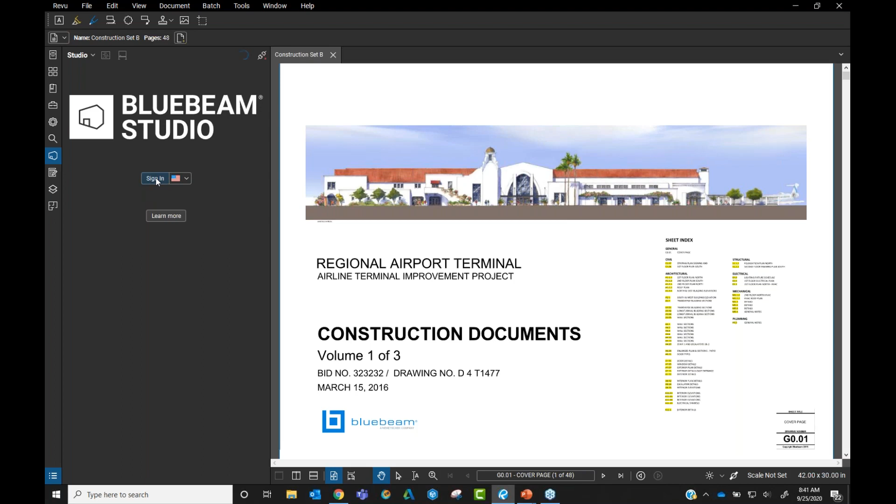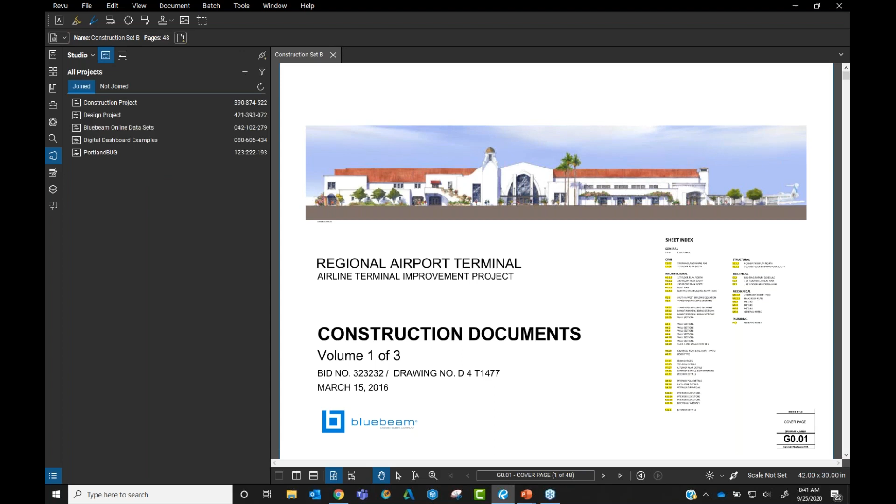So I wanted to show you a little bit about projects today. I'm going to log into Studio, and this gives me a really good talking point. I want to let you know that Studio is completely free. Bluebeam Studio is completely free. It is included with every version of Bluebeam Revu, whether you have Standard, CAD, Extreme, or if you download the free version, just the PDF reader. You're going to have access to Studio.

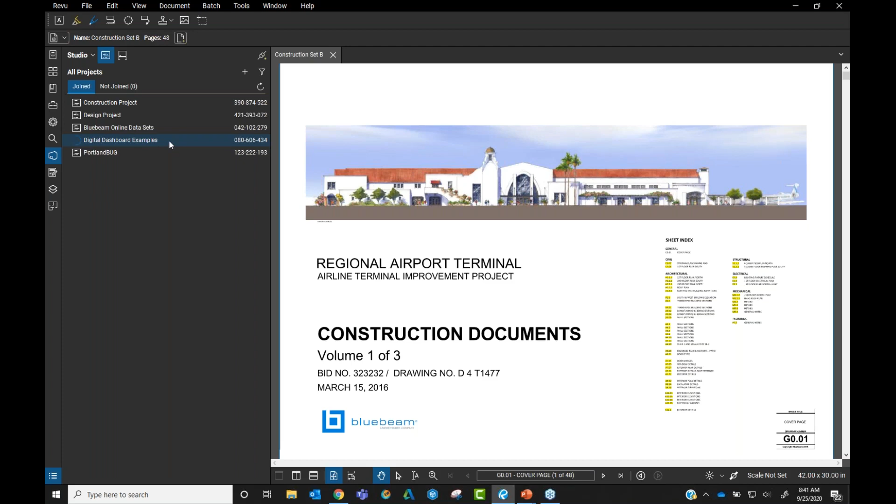Now, speaking of Studio projects, these are listed out here, and I'm going to jump into one real quick. But as it's loading up, I wanted to talk about Studio projects and Studio itself. Studio is the online collaborative environment for Bluebeam Revu, and it's broken down into two different portions: projects and sessions.

Projects is broken down into a folder structure. I like to think of this as more of a document management system or project management. In this sense, we can keep all of our documents here organized, very organized.

We can actually assign permissions. We can invite or allow access for anyone who has a Studio account, and that Studio account is free and included whether you have a paid version or not, so you can invite them here. You can set permissions overall for the project as a whole, but also drill down and set folder permissions for every folder that you have.

If you have teams out on the site that need access to specific data, you want to control the documents and versioning they're seeing out in the field, you can do that. If you have admin that need submittals, RFIs, or need to take information, any CSVs or anything we're producing from the field, any timesheets, any daily reports, we need to pull that into some other program, we can do that as well.

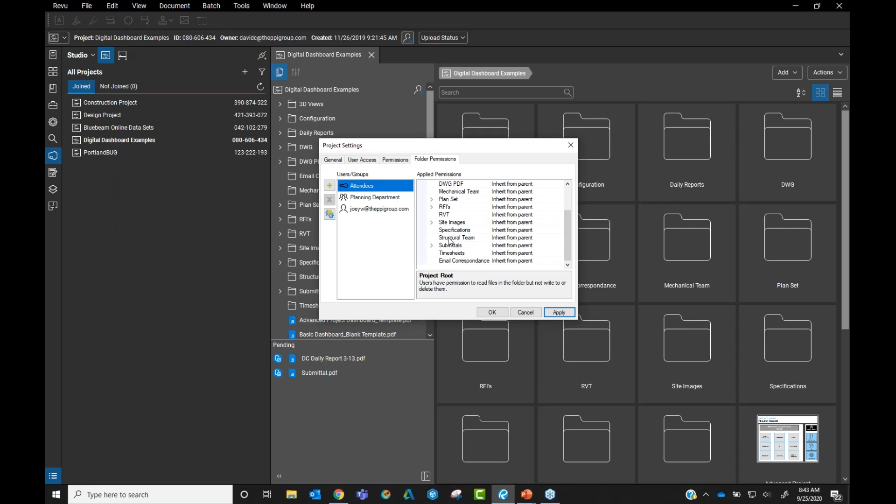Speaking of that, projects can also host any file type of any file size. So you're not limited to PDFs. You're going to see DWGs, RVTs. Now, I'm hosting these just because it's a good example of any file type.

But something that makes a little more sense might be daily reports. If I open up my Excel spreadsheet here, it's going to open up right inside of Excel. Actually, it's going to push outside of Revu, go into Excel. I can adjust it as much as I need to and push it back in.

This is a huge part, a huge key to Corsmo Construction's workflow in the sense that their personnel need to make sure they have the most up-to-date and accurate information. As we get new plan sets, we can load this information here, and essentially what we can do is keep track of, we can either slip sheet, we can replace, or we can kind of version documents through folders, we can archive it, kind of whatever the workflow may need to be. We can control that data and what people are seeing out in the field.

Or at least in general, it doesn't even need to be out in the field. It can be any project partners that you're collaborating with through the design process, or anyone that you're working with as an engineer. You're working with the designers, and you may need to collaborate and give them information.

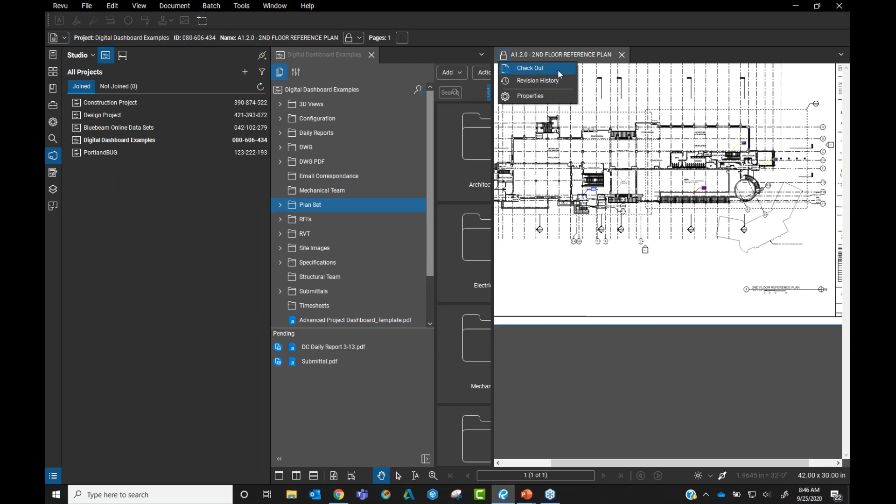For projects, and this is an interesting talking point as well, you do have to check out the document in order to mark up on it, to manipulate it, things like that. So it is a check-in and check-out workflow.

Let me close this one. I'm going to leave that open. I'm going to close down that panel there.

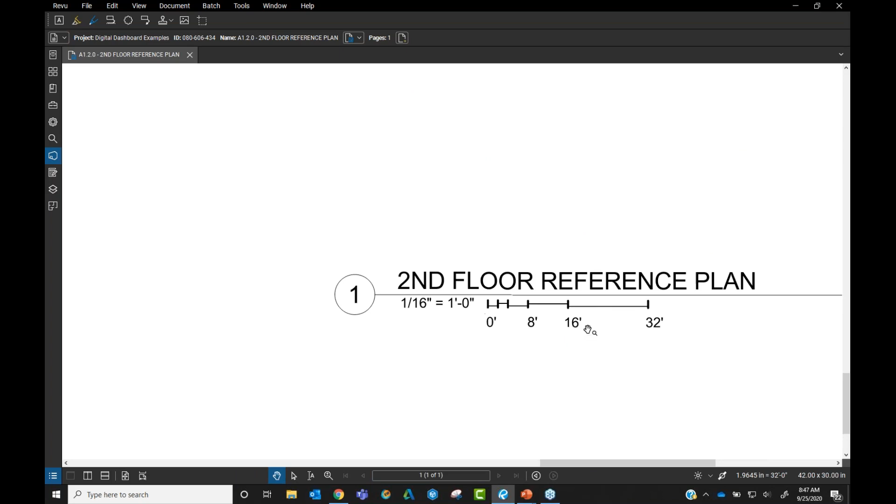I'm going to zoom in here to find my scale. As Richard said, he typically likes to take the longest dimension. I will either do that or calibrate off the document scale.

To do that, I'm going to go right up to Tools, find my way to Measure, and then Calibrate. You always want to calibrate the drawing before you take a measurement, and then double check it with a length measurement, just to make sure the scale has set.

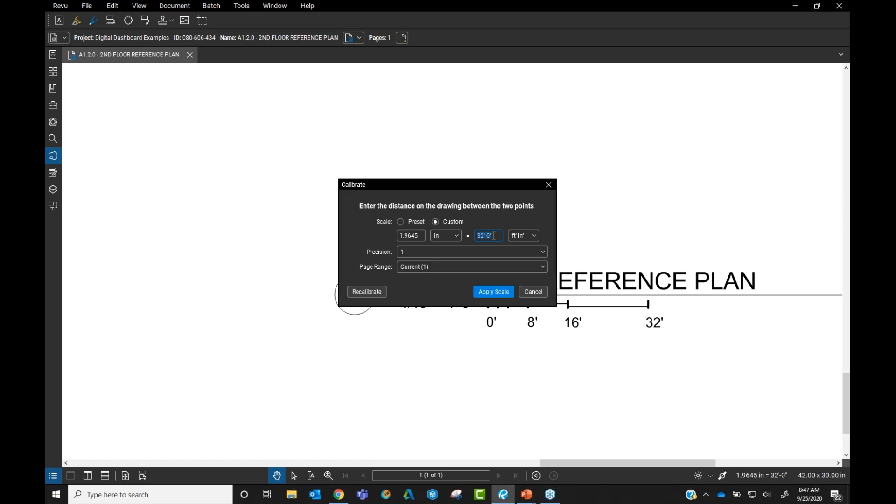So I click first on the 0, then I click on the 32 feet here. This drawing has been scaled, so you can see it's actually retaining that scale information. I don't have to do this every time I want to go in and take measurements. If I scale it once and save it, it retains that information.

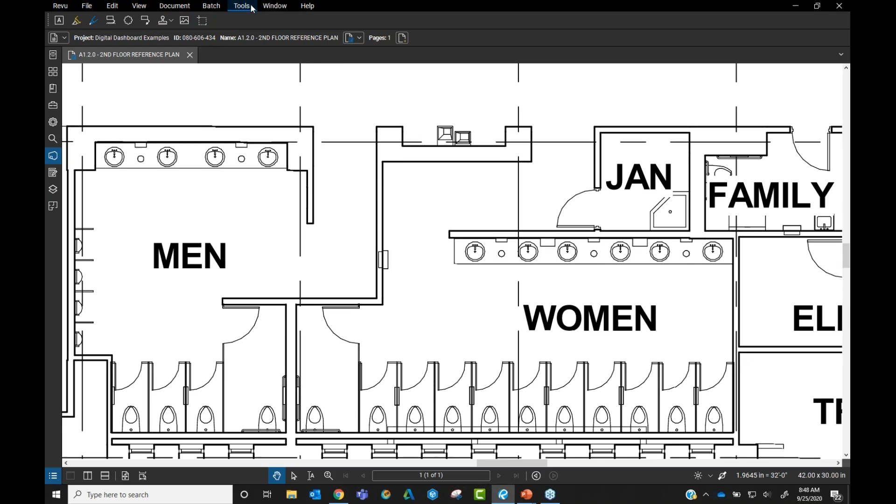Let's see, oh, this was a bad one. I don't have any dimensions on it, but what I can do is go ahead and take a quick measurement here.

Let's go from the wall. I'll hold down the Shift key. We know that ADA stall is 5 feet, so that complies with those ADA standards. That's just a good example for me to use there.

I could also probably grab this door. I'd probably go from the inside of the door jambs, but that's fine. 3 feet 4 inches, that makes sense.

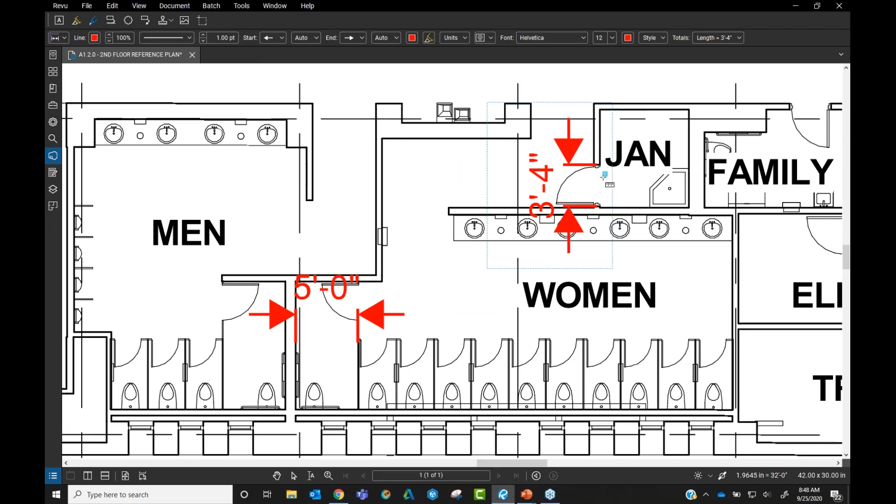Okay, so it's a quick, easy way to take nice and simple measurements. Now, this length tool here can be used in so many different ways.

One, of course, to take the length, but if we get into the actual measurement properties of this, we can adjust how this measurement works. There are so many different ways we can utilize this information, and that's not even getting into the rest of the measurement tools. We have a plethora of them: poly length, area, diameter, volume, and the count tool is also a very awesome tool.

So I'm going to get back into my presentation here. All right.

Up next, I have a quote from Jesse Hornbuckle, who is a GPS technician with Dirt Logic Incorporated. Jesse says before Bluebeam, they would commonly receive drawings that had been changed by engineers, and the engineers forgot to notate what's changed in the drawings. I've heard this is a common thing in our industry, and depending on the size of the project, finding those changes and reflecting them in our drawings can cost more time and money. Somebody has to figure out what's changed.

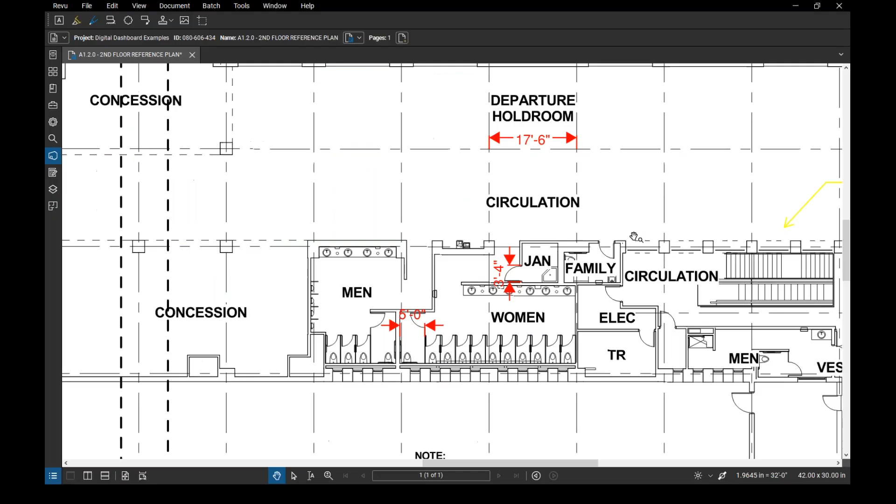So I'm going to show a couple things here. I'm going to go ahead and close out of that document, and check it in so I don't have to worry about that later. Now I'm going to open up one of my floor plans, and grab the revision of that floor plan as well.

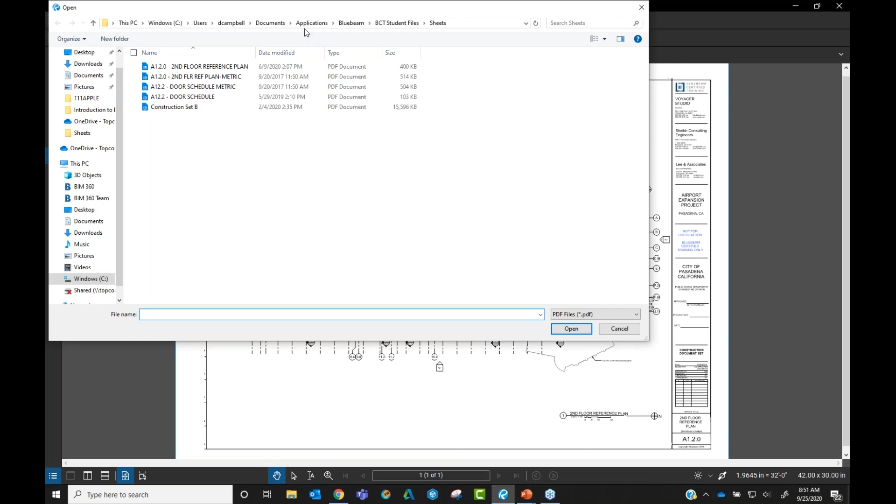So we'll see on this revision, they've made some clouds, but as we can see, they also haven't caught everything. I know that door is not supposed to be there, but let's say we don't notice that. We want to use either Bluebeam's document comparison tool, or the overlay tool, to show us the differences between the two. Personally, my favorite is the overlay tool.

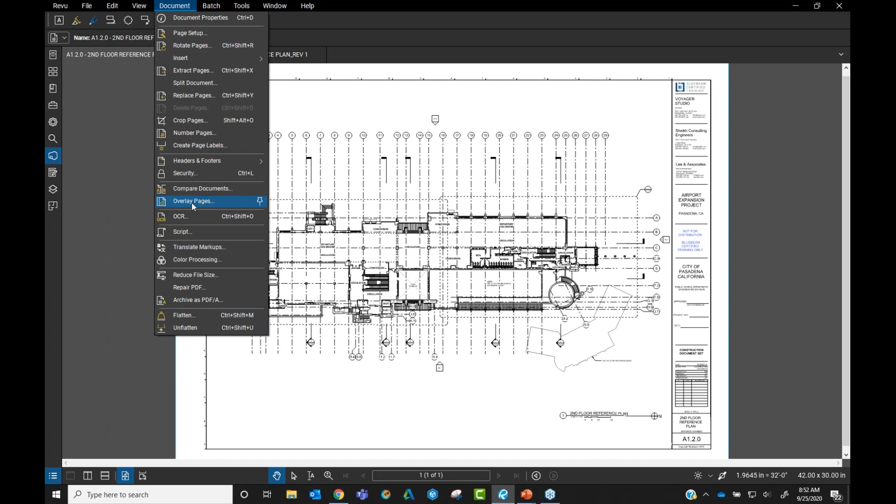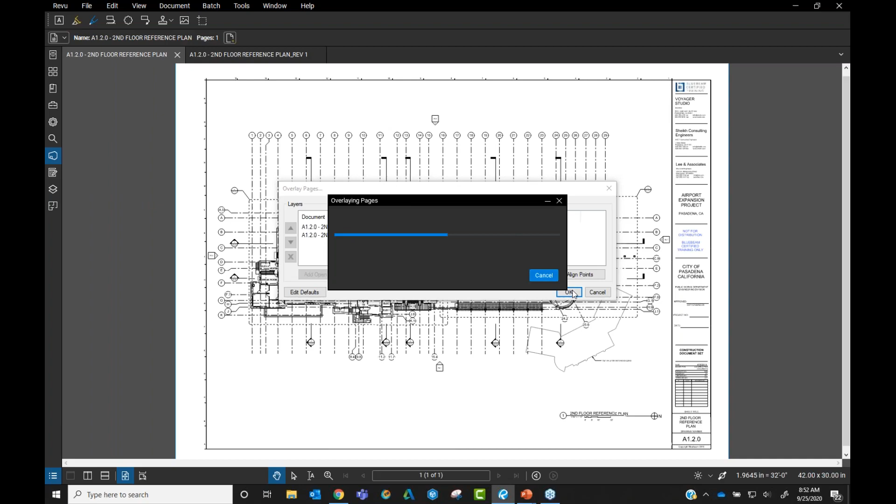To find these, you go to the Document tab in Bluebeam, and then there's Overlay Pages. The beautiful thing about this workflow is it takes these two PDFs, and with overlay, compares them together by literally overlaying them like a light table. It assigns each of these documents a colored layer, and then as it overlays them, we should see the differences between the two. Okay, so we can see here is the revision.

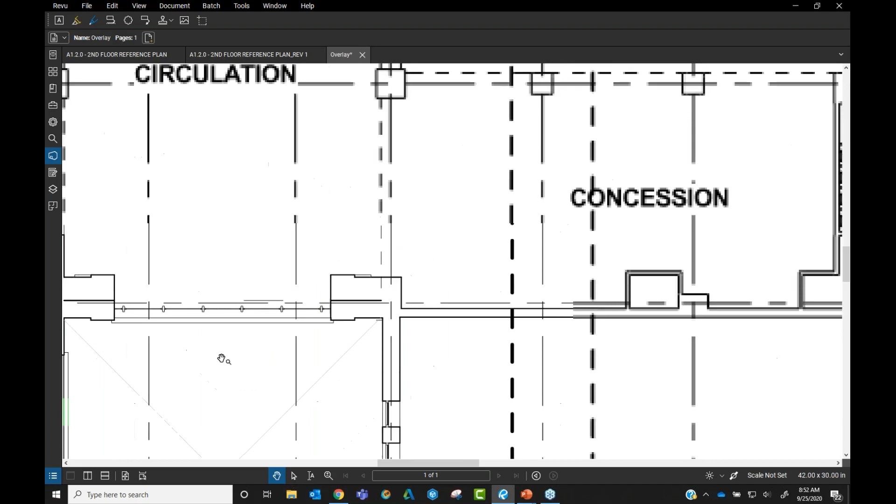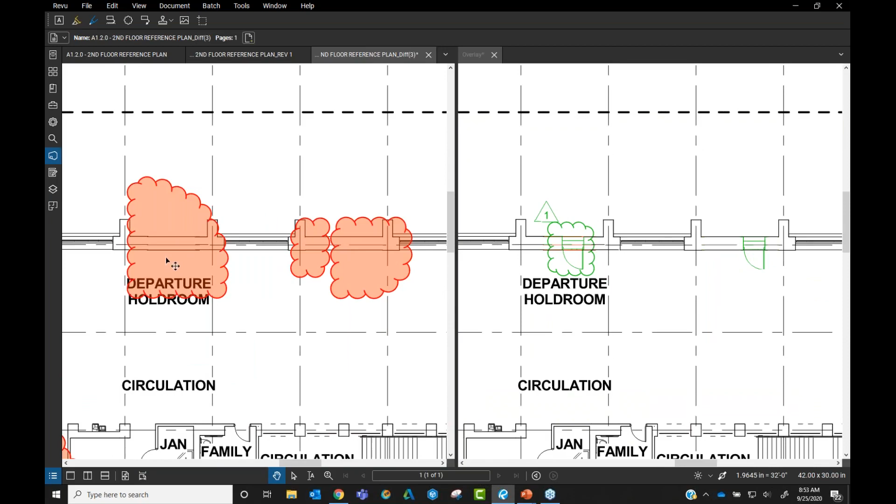That's actually there, so that's fine. We also see they added a door here, and obviously it changed the wall. This one's a simple line style, but it tells us exactly what's changed between the two documents. With document compare, it actually clouds the differences between the two—I'll see right in here that it clouded where I didn't originally have a door, and other differences like that.

Document comparison clouds and places a markup, which is also trackable in our markups list, so I can see each one of these revisions on the document.

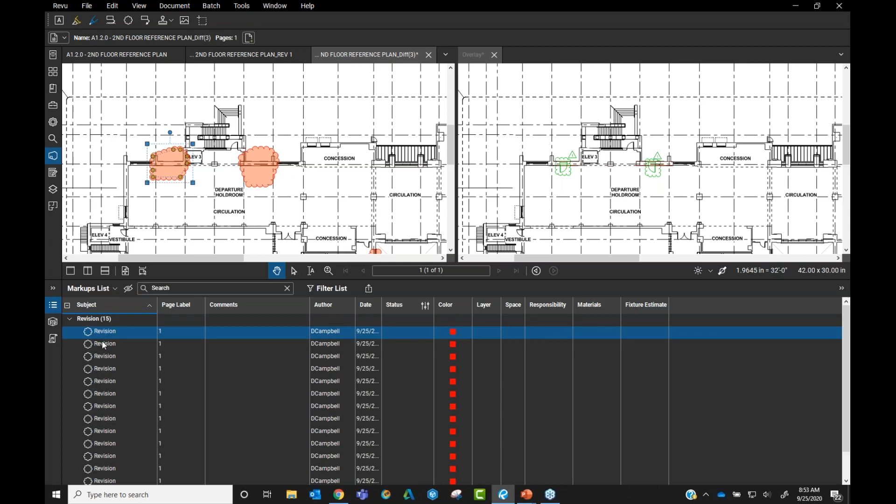And I can go ahead and print this out—I can send it either to a PDF, or if we use an Excel workflow to track these different changes and how sheets have grown or been revised, we can print this right into CSV and take it out into Excel. It's a very awesome process.

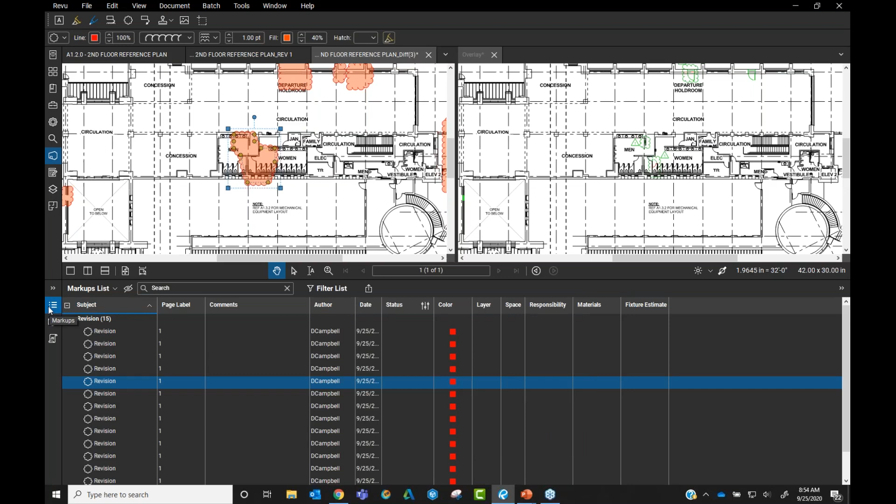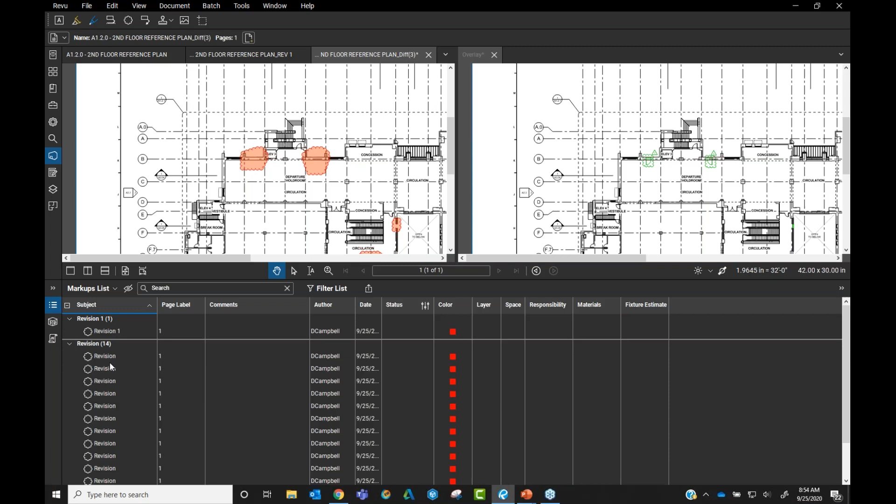Now, let's say you wanted to do this multiple times—you can use revisions, Rev 1, Rev 2, Rev 3, and we can always adapt any of these markups. You'll notice with something like this, Revision 1 is now separated from the rest. Bluebeam has some intelligent data in the markups list to separate the markups it knows are different, helping us organize them and keep that data streamlined to whoever it needs to go to.

Now, for my final case study, this comes from Marque Engineering.

I told you guys I tried to get a wide span, right? We tried to get a few different viewpoints on how companies use Bluebeam Revu.

John Graves tells us he uses Bluebeam for measuring, as well as getting areas—measuring PDFs to get areas, and directly commenting on drawings. He also uses it as a tool to create PDFs, so it's got that multi-use vibe. We can create PDFs from any of our design applications, or from within Bluebeam Revu itself, but we can also use it to take measurements such as areas, lengths, and volumes.

Sean Campbell says, I really like Bluebeam's wide array of editing capabilities for inserting notes, clouding important details, or even drawing rough sketches. It also has an excellent PDF printer.

So with drawing those rough sketches, I want to go back into Revu real quick. You'll notice we have a grid and snap capability within Revu, so we can set our grid up however we need it, whether spaced at 1/2 inch, 1 inch, 2 inch, what have you. We can use the Bluebeam markup lines and polylines to draft out different details we may need information on quickly, whether from the field or in the office.

If you collaborate through Studio, anyone anywhere can have that drawing, and they can go mark it up as needed, sharing that data, sharing design intent or constructability, what have you. It goes to show, or push, the speed of how this can improve the communication process—everybody having access to that information and the tools needed to share or specify it.

Now, Kyle Russ says a big part of what he uses Bluebeam for is reviewing PDFs of existing information on a project before and during design. He also uses it for printing review sets for projects, printing final permit sets, and reviewing RFIs and submittals during the post-permit stages.

Speaking on that point, Bluebeam Revu has a very powerful markup engine. We've talked about the measurements and things like that, but let's push past that for a second and start looking at some of our forms.

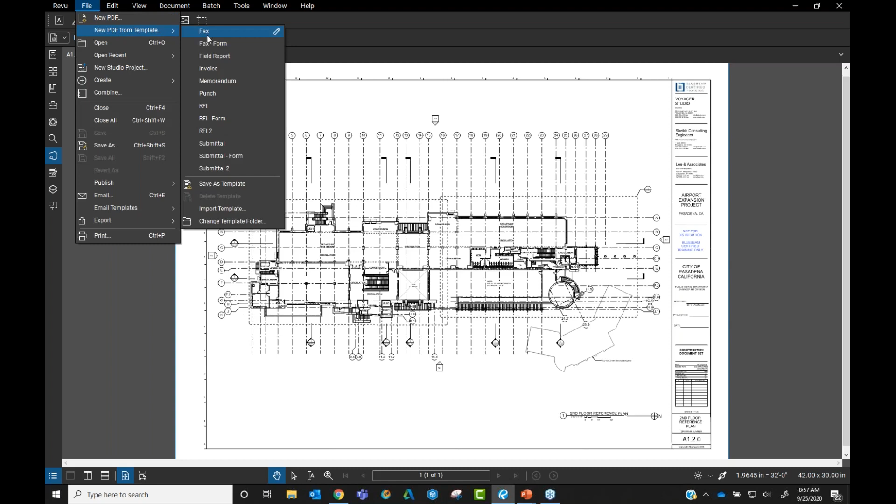Bluebeam Revu also has a great form engine. Let's take something like this RFI—it has preset text boxes that we can go ahead and fill with information, whether they're text boxes, signature blocks, dates, things like that.

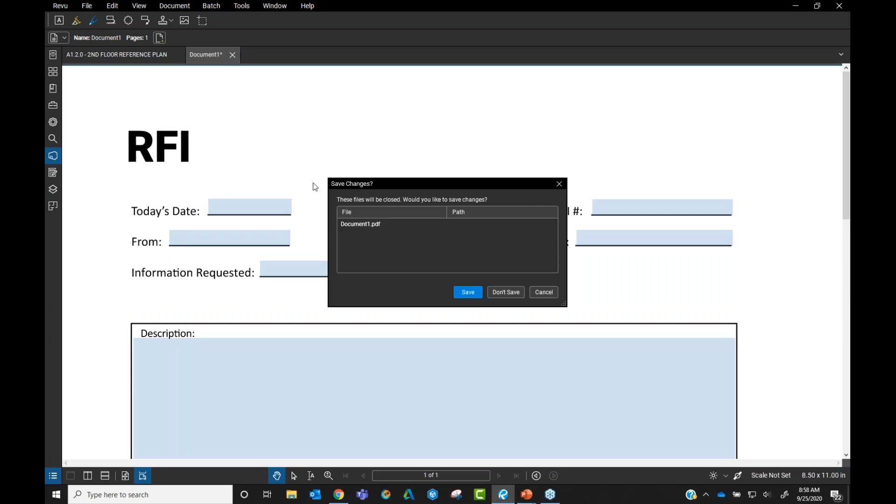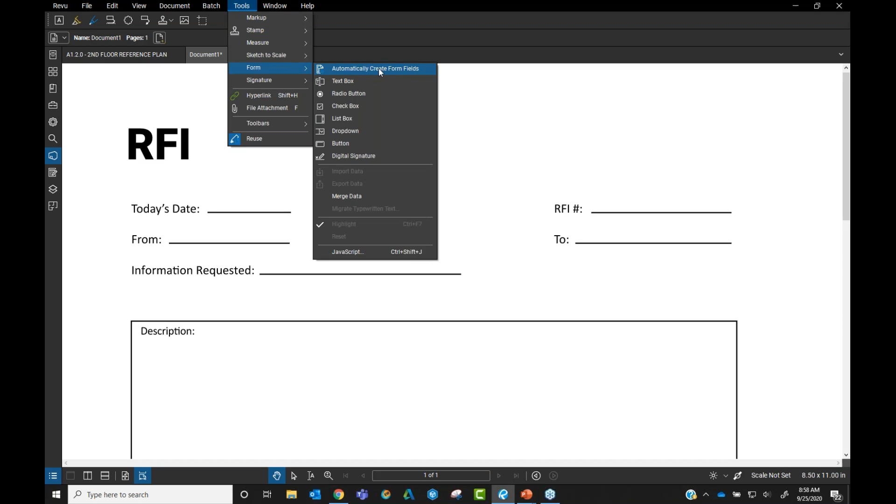Now, maybe we don't have a digital form yet. Maybe we just have an RFI such as this, a blank form that we would typically print out or send and someone can go ahead and sign. With Bluebeam's form tools, such as right here, we can automatically create form fields.

Something like this is very powerful for helping us to digitally replicate our forms and get them where we need them to be. That was a very quick process, and it went and placed those text boxes wherever it detected a space for that text box to be placed. The lines, the text, it kind of looks at the content of the PDF itself and places these text boxes, or signature blocks, radio buttons.

Some of those, I'm not gonna lie to you guys, are better if you place them. The text boxes are great, they will go out and place themselves, but the radio buttons, the check boxes, some of those are better placed and organized yourself. And if you're curious, we do have a video on our website about digitally creating these forms, and we give some tips and tricks on how to create these.

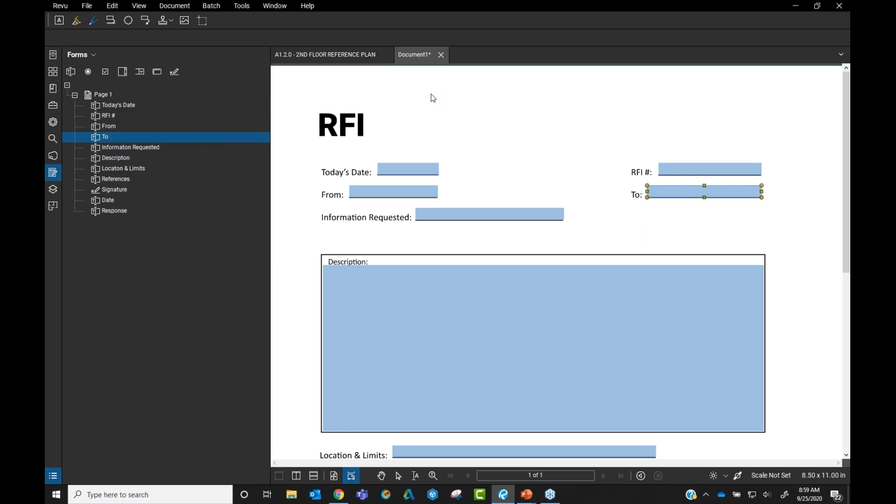But this is a very strong engine for creating these forms, JavaScripting into them if needed, and connecting that data throughout the entire process of our project. So I'm not going to save that.

And finally, Chris Hess lets us know that he enjoys the markup abilities that Bluebeam offers. In our industry, things are constantly being marked up, and this software helps with this significantly. And that's just another shout out to Bluebeam Revu's markup capabilities.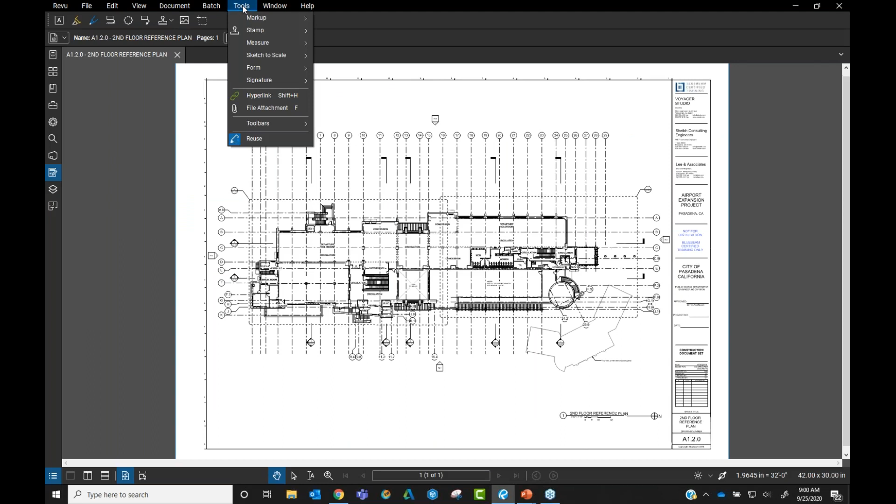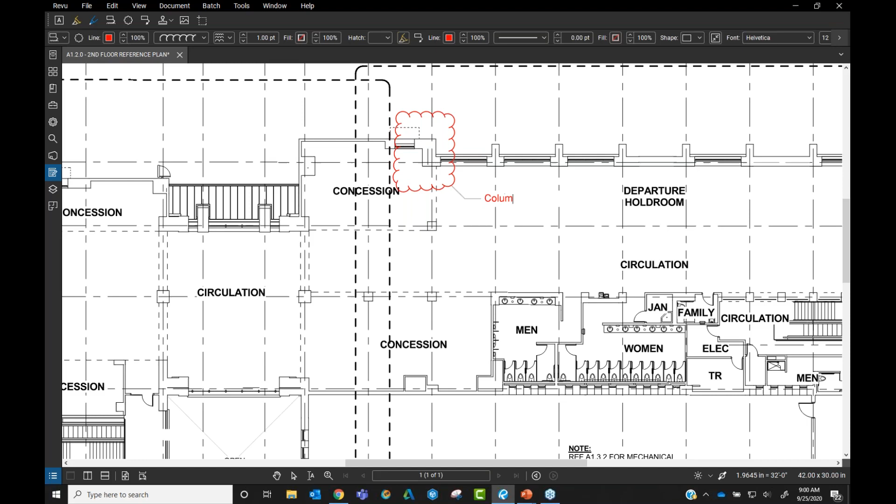And actually, I don't think I actually showed those, so I'll come into tools and then markup. So here are all of Bluebeam Revu's markup tools, the note tools, the Cloud Plus. It really just goes to share information, either pulling attention to details, sharing information, column detail.

There we go, and it's a very, very quick process. Right now, some of you are also maybe asking, is there anywhere else that we can get access to these tools, or how would I reuse these tools without having to go up to tools, markup, and click it every single time?

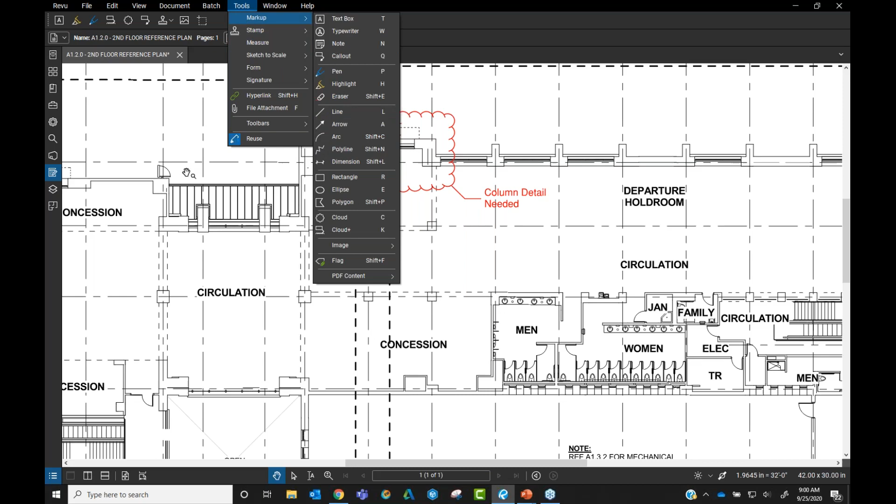Well, one, I would advise you to have your reuse on, but two, I would go right over and look at that tool chest that Bluebeam Revu has here. The tool chest is huge at really allowing us to reuse tools, storing smart properties in our tools.

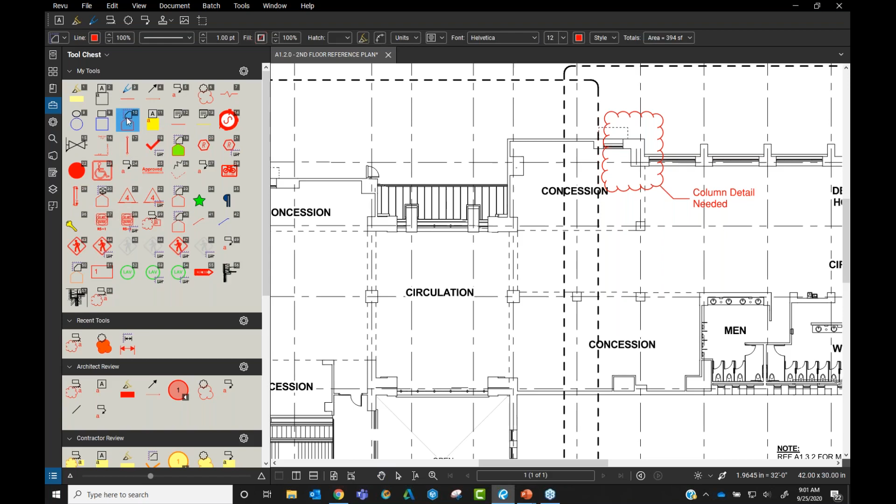So these measurements, the area measurements we were kind of talking about, the volume measurements. I have a volume measurement here, and that's a type 1, so I'm going to leave that one there, but I'm going to come up to flooring. So this is specifically if I wanted to take a flooring measurement in, let's say, this bathroom here. I can quickly trace around and get the measurements for this room.

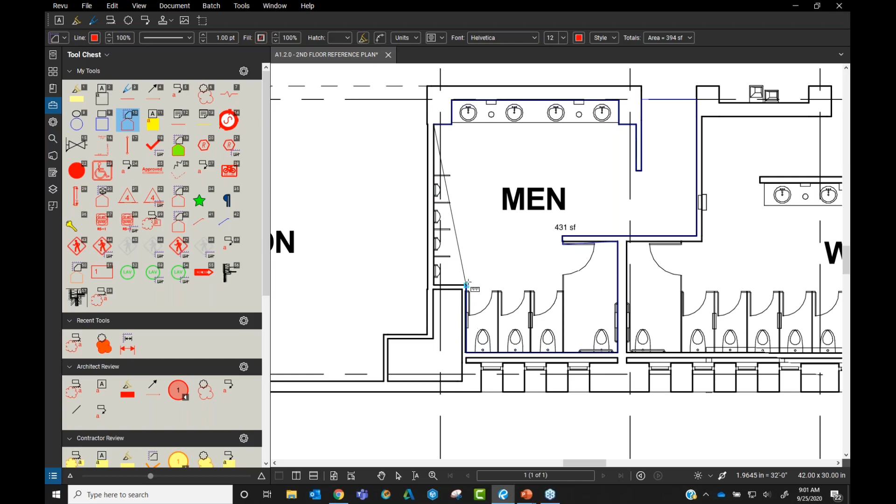Now, what I wanted to really show here was not that, this is a great tool, of course, this is an awesome tool, this is our area tool here. But what I also wanted to show was that you'll see it keeps 4-inch ceramic tile. This floor knows what it is.

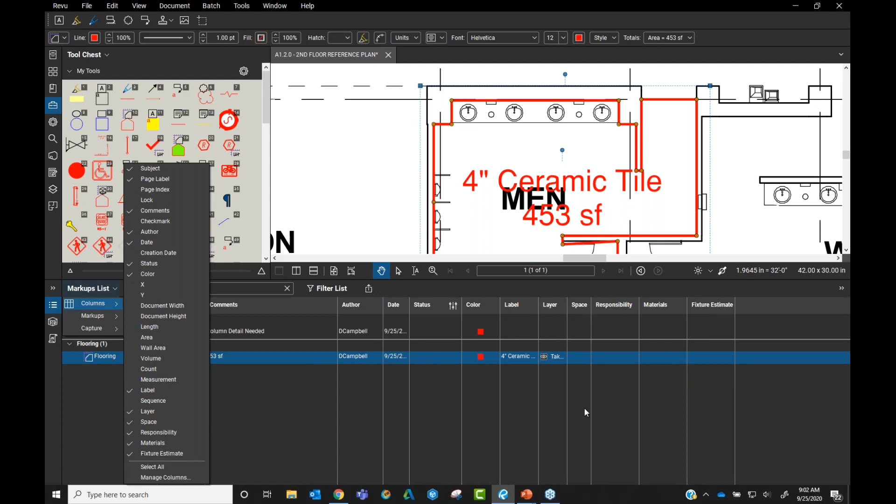And when I pull up this markups list, it's tracked as flooring. And if I bring up the label for this, it knows that this is 4-inch ceramic tile. Every time I place this comment with this area tool, that's what it's going to come up as.

But that kind of goes to show the strength of that tool chest, whether it's storing your commonly used measurements, whether they're different types of flooring or different types of wall paint, drywall, water fixtures, anything like that. We can keep a library of it, even down to our actual comments themselves.

Maybe we want to track when the architect makes comments, or the contractor themselves, an engineer, or maybe we have specific departments that we want to segregate this out to, and allow an organizational filtration of those kinds of comments, so we can get down to the specific information that we need. And of course, these tool sets are all shareable, so they make it very nice and simple to post out this data and use this data.

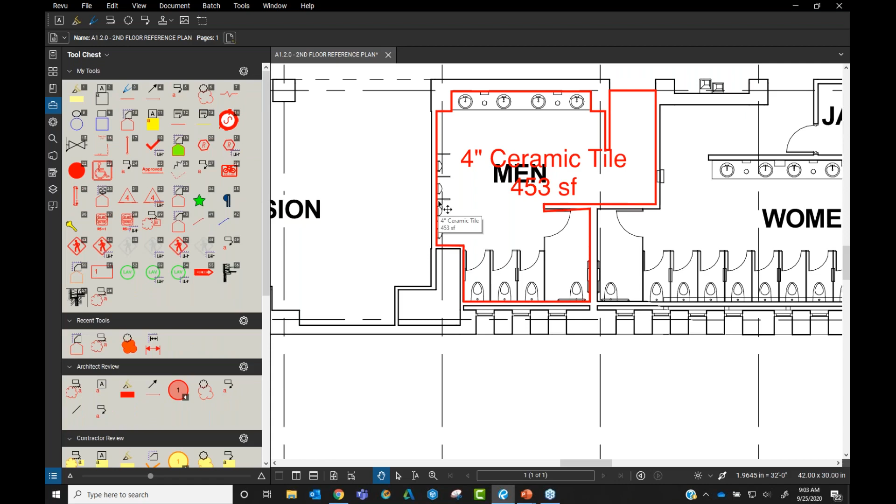All right, so I wanted to kind of recap what we talked about. The markups, those markups and those measurement tools, they allow us to digitally review drawings with specialized tools such as the clouds and customize their properties to fit your needs. And we can take calibrated measurements right from the document with tools such as length.

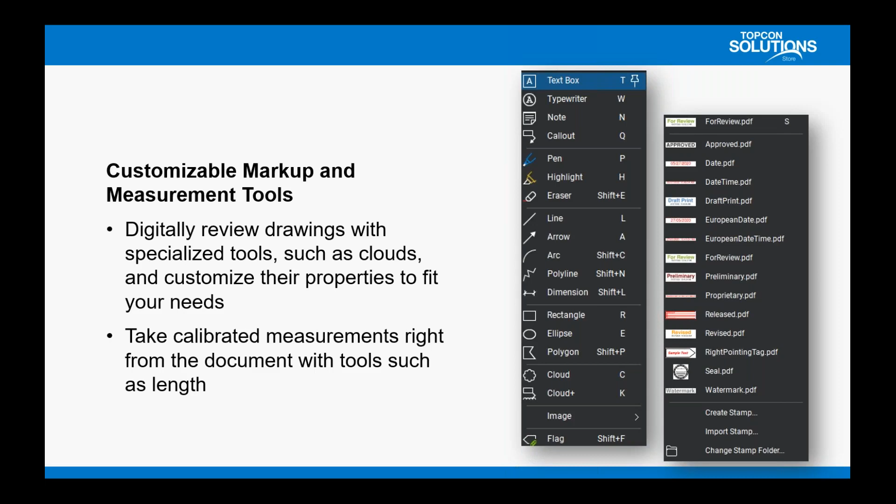The tool chest allows us to save our commonly used markups to the tool sets for easy reuse, and you can allow anyone to use them with easy deployments across projects and teams.

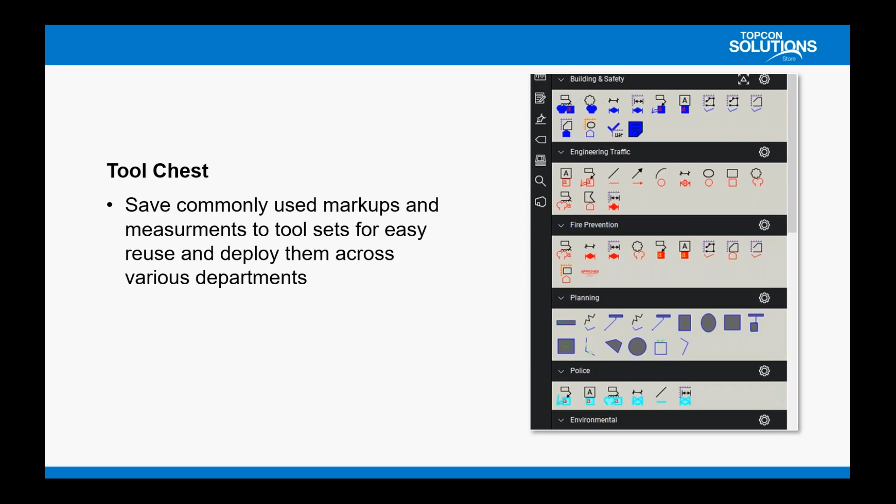The markups list allows us to attach, track, sort, and filter markup data. We can export that data for additional uses, whether it's Excel, PDF, whatever you need, sharing that information however necessary. Because it separates those comments by the intelligence stored in their properties, it allows us to sort and filter through to customize those reports or the data we're pushing out.

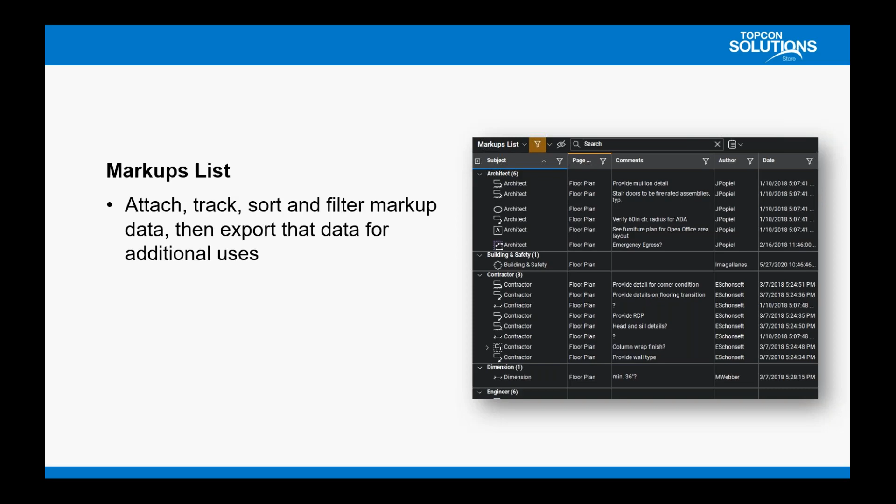And then again, Bluebeam Studio. Studio allows us to review, markup, modify, and update documents with project partners worldwide. With Studio Sessions, which I didn't talk too much about, that's actually the online, real-time collaborative environment for Bluebeam Studio. Bluebeam Studio Sessions allows you to host up to 500 people in one session to collaborate instantaneously.

Well, depending on the broadband strength, right? Another good note is that if anyone needs to take this session out to the field where they don't have Wi-Fi, they can simply step offline and place comments as needed. When they come back to any Wi-Fi or internet, they can come back online, and it's going to update all of their comments. The studio session document is hosted on the server, and as everyone comments and marks up on it, that server keeps refreshing everyone else's data and documents, so the document you're looking at always has the up-to-date information. That's Studio Sessions.

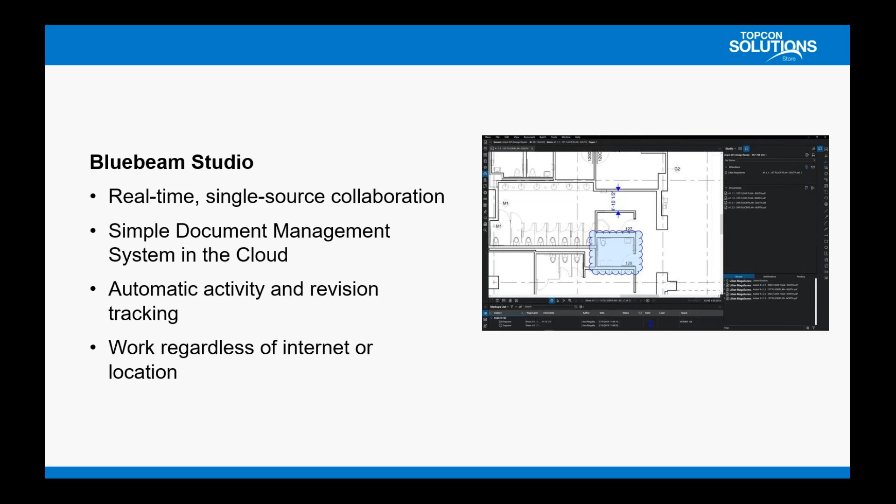With Studio Sessions, we can connect project partners worldwide, same as Studio Projects, but we can give them that real-time collaboration environment capability. This allows us to reduce response times and complete projects faster by working in real time with those project partners, also reducing printing, shipping, and rework costs by giving everyone access to the same sets of documents.

All right, so time for those tips I was talking about earlier. Some of you may be asking, okay, this all sounds great, but what can we do to ease our transition into Bluebeam? Whether you're coming from an existing PDF reader writer, or this is brand new to you, or maybe you've heard of it but are just seeing what these PDF softwares are all about, how can I go digital?

Well, the first thing I would think would be PDF standards. Standards allow us to easily identify the drawing by name, the vector file types, in order to facilitate the most efficient review for that document.

The next thing I would say would be a pilot group. Get a pilot group going, test and gather feedback from subject matter experts from various departments to refine that process that you're going through.

The next one is tool standardization. Build a library of markup tools, your profiles and your stamps, to increase clarity and intent. So any of those tools that you need, start looking at those.

The next one is reduce the time spent looking for plan sets by adjusting those naming conventions on your document. So whatever it is you need to transition through, you can reduce that time spent by adjusting or adopting those naming conventions.